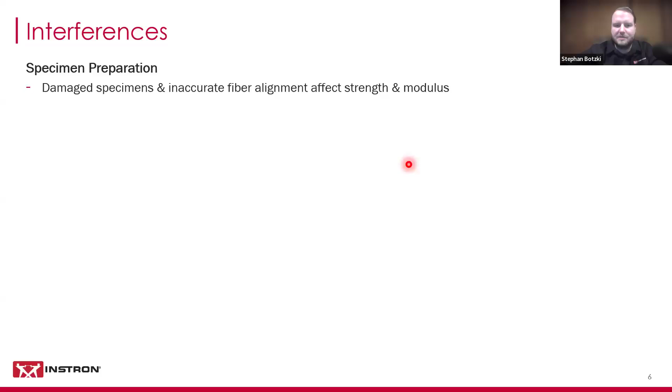The same is true for inaccurate fiber alignment, which is much harder to figure out, but there are things in the testing standards and practices you can use to find out if your alignment is in good condition, within the tolerances the standards allow.

You also need the right ratio of gauge length to thickness to prevent buckling in compression tests, for example. Testing standards give good guidance on what ratios to use, or they have standardized specimens known to work well.

So if you need to make adjustments to yours, make sure the ratio works. Otherwise buckling will affect your strength and especially your strain and therefore modulus readings.

On the other end, if you're doing tension tests, you should consider maximizing the length of your specimens beyond the minimum length requirements in the standards. There's typically, from what I've seen, no maximum length, just a minimum length.

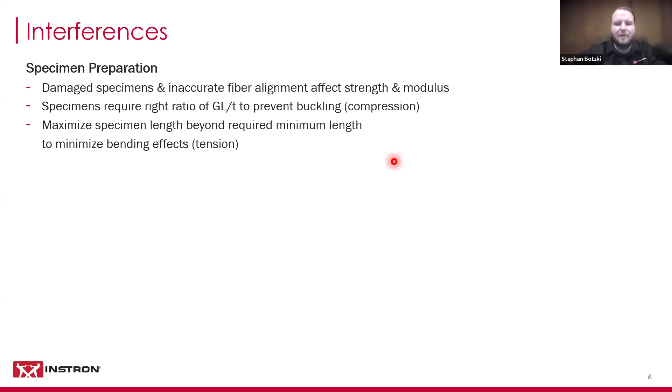If you think about it, if you maximize that, any bending errors introduced from the grips would be minimized—the longer your specimen is, the less effect a certain amount of error will have. So just increasing the length can help you with that.

If you're doing end loading tests where your specimen gets end loaded, like ASTM D695, or a combined loading test like ASTM D6641, you need to make sure the ends of your specimens are flat and parallel, because that's one of the major ways you introduce the load in combined loading, for example. If your ends are not flat, you'll have uneven load introduction into your specimen.

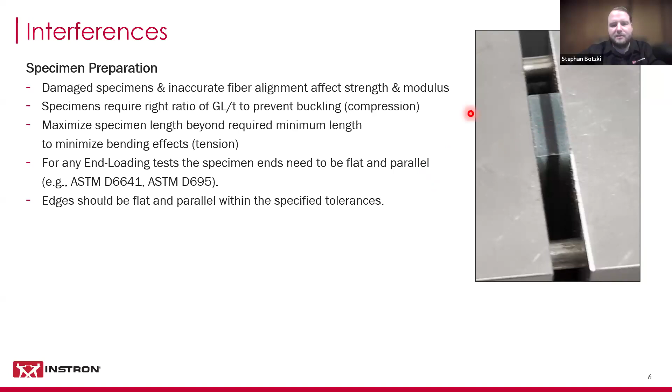You might also have failures where you didn't want them—you don't want them to fail at the ends. The edges of your specimens also need to be parallel and flat within the specified tolerances of the testing standards.

And lastly on this slide, make sure you label your specimens so that if you need to check back for any errors, you can trace back to the raw material your specimens came from.

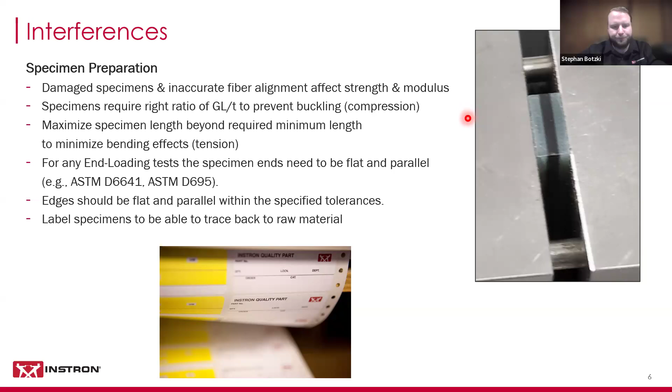If you make specimens, you should consider molding them individually, or if you have to, cut them from a plate. If you cut them from a plate, make sure you avoid any notches, undercuts, or rough and uneven surfaces.

Or you could also have delaminations, caused by inappropriate machining methods—this is when you're actually milling the composites. So be really careful with that.

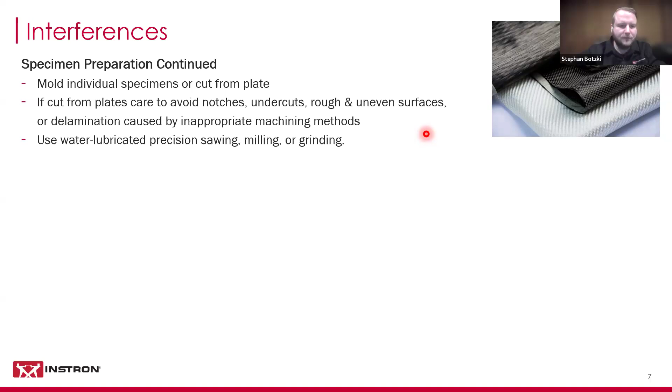Typical processes that have been used successfully in the past are, for example, water lubricated precision sawing, milling, or grinding, and diamond tooling, which is very effective for many material systems.

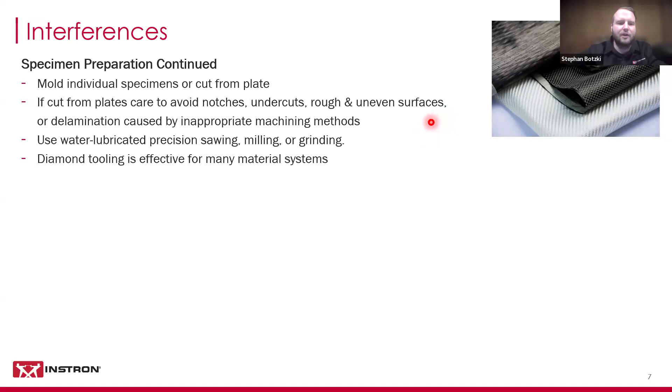There are also testing standards that focus on this, for example ASTM D5687 for preparation of flat composite panels, which has processing guidelines for specimen preparation specifically. You'll see some of these standards referenced within the testing standards themselves.

In ISO, for example, there's 1268, the method for producing test plates and molding of prepregs. And in the testing standards themselves, for example ISO 527-5 for unidirectional fiber reinforced plastics, there's a lot of information on how to properly prepare your test specimens and tolerances and so on.

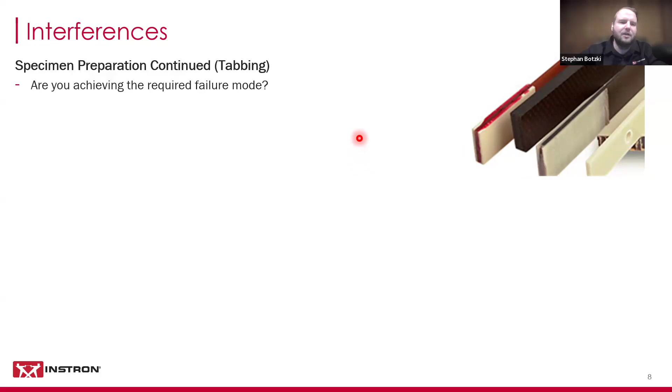One question when we talk about tabbing is, are you actually achieving the required failure mode within the testing standard? If you're having a successful test where the specimen fails in the gauge section with the right type of failure mode, you probably wouldn't even want to consider tabbing because you're achieving the right results. But if you have grip failures or failures outside the gauge section, that's the time to really think about your process and consider using tabs.

What you could start with is something like friction tabs, like emery cloth or sandpaper. Using the rough side is usually what has been successful for me personally. You put that around your test specimen ends, then clamp onto that with your grips. That has definitely helped me achieve the right failure modes and get them in the gauge section of the specimen.

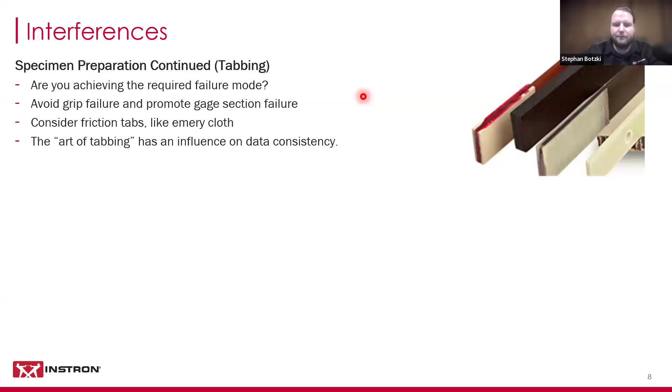Sometimes friction tabs alone are not sufficient, and then you need bonded tabs that are glued to your test specimen with an adhesive. Tabbing itself is kind of an art, and it can definitely influence your testing data and the consistency of your data. So just like the specimen preparation itself, where you machine the coupon, you need to take the same care with your tabs and follow the tolerances within the testing standards.

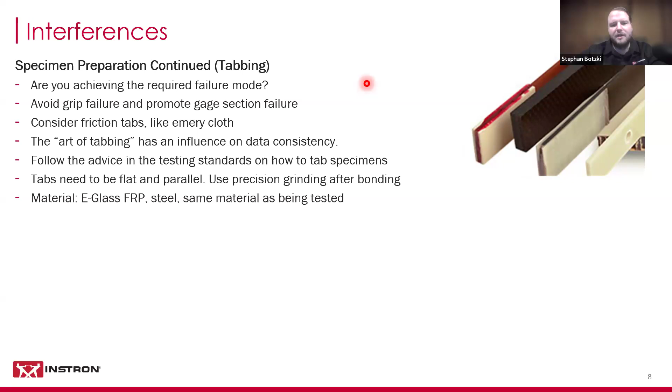That's what you should look at when figuring out how to tab and what tolerances to follow. You also need to make sure they're flat and parallel, using precision grinding methods after they've been bonded. Typical materials used are glass fiber reinforced plastics bonded to typical CFRP coupons. I've also seen different metals like steel or aluminum used, and some testing standards actually recommend using the same material being tested as the tab material as well.

A little bit on strain gauges here. Strain gauges can also give you strain anomalies due to either direct gauge disbonding, a potential separation of the leads to the strain gauge, or the surface ply of your specimen separating. All of those things will affect your strain measurements, and strain gauges are still a lot of the tests required to obtain your strain data.

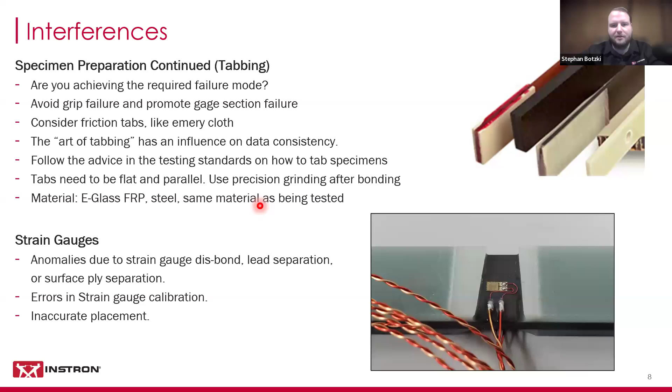You could also have errors in your strain gauge calibration. You've got to make sure, for example if you set it up in Bluehill, that you use the right gauge factor for your strain gauges. And of course, inaccurate placement of the strain gauge itself will also cause a lot of inconsistencies in your testing data because you're just not reading your strain data in the right orientation.

Now let's assume you got your perfectly prepared test specimen. You need to measure it as well, and there could be inconsistencies if you're not using the right procedures, not always doing it the same way, or if the equipment you're using isn't accurate enough. Testing standards typically have sections or reference other standards focused on measurements, giving you the required tolerances for the equipment you use, like micrometers—what kind of end they need to have where they touch the specimen, and the accuracy they need to have.

In general, composite testing standards like ASTM D3039 or 6641 are very popular, and they typically require you to measure the width and thickness at three different locations within the gauge section—which is also where we want our failure to occur. So that's the area where you do the three different measurements for width and thickness, and then you average those, and that's what you use for your values.

There's also software assistance you can use. You can see here on the screen how you can connect a micrometer directly to Bluehill Universal, then measure your specimen, and either with a click or with a foot pedal, if you prefer that, you can have that data directly entered into the testing software. That way you can avoid any kind of error between reading the result and actually entering it.

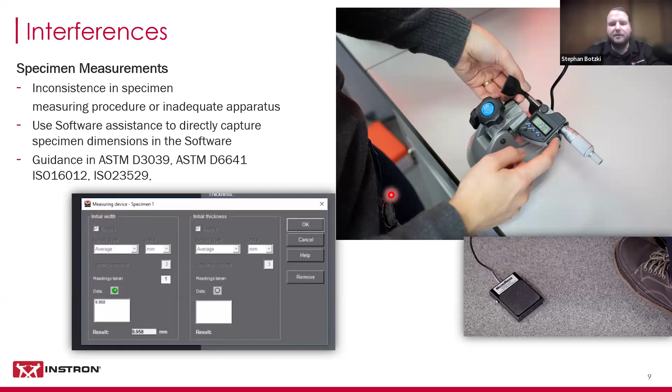There's also a feature in our software called Workflow. You can find it in the Method tab, and then in the different tabs below, all the way to the right, there's a section called Prompted Test, which you can activate with this toggle called Run as Prompted Test. You toggle that on, and then below you can make different sections of the test.

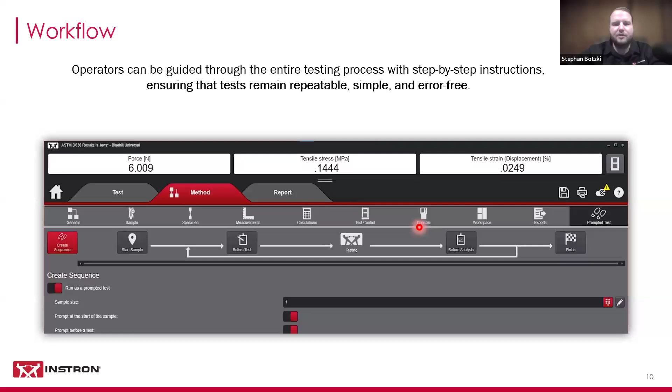You can see that in the workflow itself, at those steps - for example, you start a new sample, or batch, right before the test of a specimen, before the analysis, after the test. At all those different sections, you can prompt your operators and put little notes or little pictures like you can see here.

You could put any kind of important note or specific equipment that has to be used. You can use pictures to prompt your operators and guide them through, so they need to click on the arrows on the bottom to advance further and make the required entries.

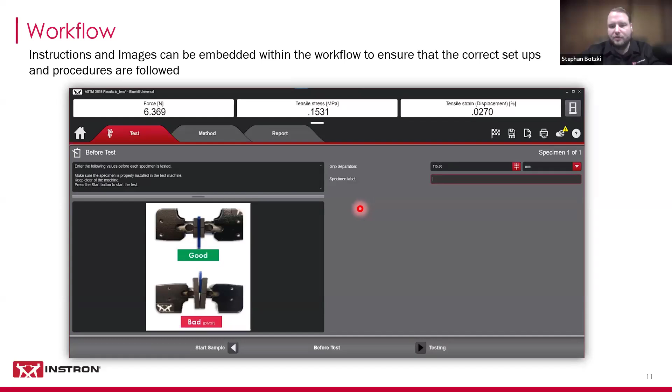You can remind them, for example, if you're using an extensometer, to make sure it's the right type that they're using, and that the placement onto the specimen is correct, and that the extensometer is not crooked, because otherwise that will give you variation in your strain measurements, and therefore inaccuracies.

Now we're going to move on to the next section of our presentation, which is on test equipment considerations, from Ashley.

We definitely want to ensure we are using a stiff machine to handle those high strength materials. Here we have data collected when we performed high strength breaks on our latest 6800 series of frames, showing that the bulk of the energy, as shown in Gs, is absorbed in the base of the frame at 145 Gs, followed by the crosshead at 105 Gs, with our critical electrical components and where our motor lives experiencing the lowest amount of Gs during the high energy break at only 27.

This is all influenced by the preloaded bearings, precision ball screws, the solid thick crosshead, the solid base beam, and low stretch drive belts. Ultimately, this leads to superior performance and longevity of our frame.

These design considerations are also super important, as we want to keep the testing machine compliance to a minimum, as it affects the strain rate when we're using crosshead control.

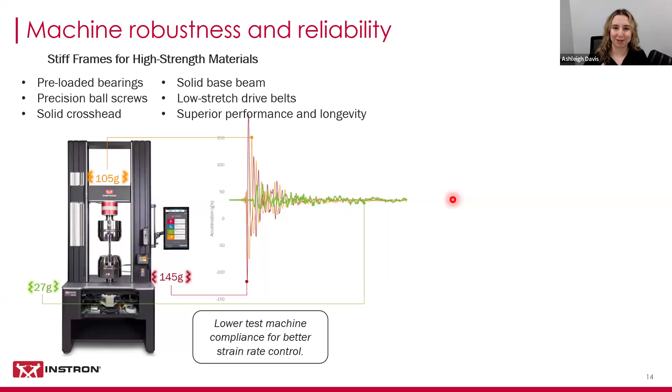Machine compliance can also be influenced by having a simple load string with as few connection pieces as possible. We want to make sure we're not over piggybacking within the load string, because we're then just building compliance essentially. And it's also these design considerations that influence our load string alignment.

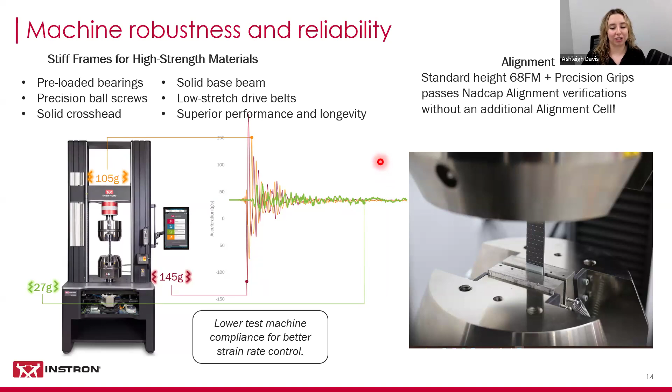The 6800 series of frames with either precision manual wedge grips or hydraulic wedge grips can actually pass NADCAP alignment verifications without the need for an additional alignment cell, when being used with our standard height of frame or our E1 option of frame. I'm going to get much deeper into alignment later - we're going to spend some time on that.

To keep our frames functioning for the long run, we made design changes to our floor model systems to improve the ingress protection of those electrical components and where the motor lives, to better deal with all of that carbon fiber debris. We wanted to make sure we're preventing all of that from getting inside and gunking up our components.

The 6800 series frames were designed with improved ingress seals to combat the dust and debris by adding a gasket between the rear cover and the base beam to reduce the gapping that might have been there. And we improved the existing gasket on the front cover.

On the right, you can see our previous generation of frames where we had some cabling and a limit rod. There were actually access points to go into the base of the frame, and those holes can allow for dust and debris. So our engineering team removed those completely, so we are completely sealed.

It's simple changes like these that can help strengthen the protection of those components within the frame, which means less time for having to clean and hopefully less servicing.

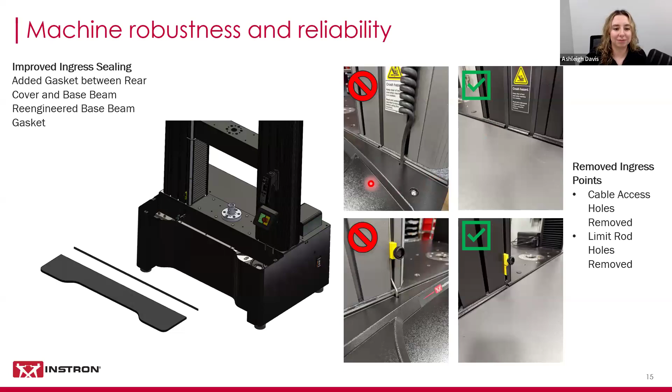I'm going to spend some time talking about load cells. Instron is really unique in that we're the only global material testing supplier that designs and manufactures its own load cells. And an important point here is the measuring range.

You can test down to 1/1000th of the load cell capacity and still meet the accuracy requirements of international standards at 0.5% accuracy. This allows you to conduct testing which requires high forces, maybe tensile or compression tests on coupons, and then also testing for lower force tests, such as interlaminar shear strength testing, without actually having to switch out your load cells.

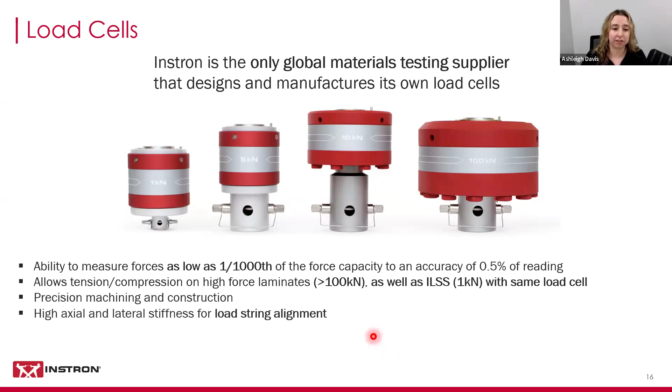Now, as I said before, we don't want to add more compliance than we need to the frame. So if we don't have to piggyback, we definitely don't want to. All of our load cells are high quality, manufactured using precision machining and construction. And then, as I said before about the frame, high stiffness is important. So our load cells also have high axial and lateral stiffness for load string alignment, as well as reducing that compliance.

So next I want to talk about how do we actually read the specifications of our Instron load cells. On our product sheets, we state that the load measurement specification as a percent of reading down to a fraction of a load cell's capacity.

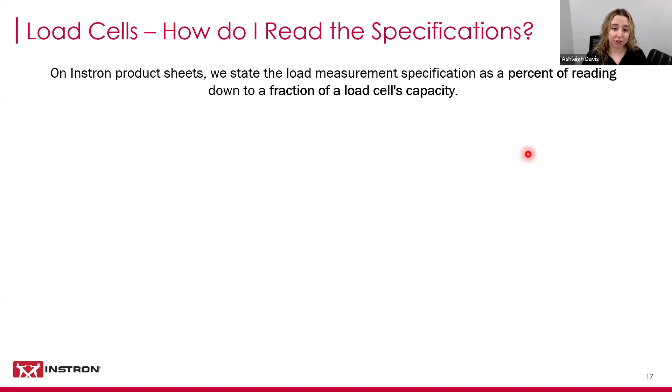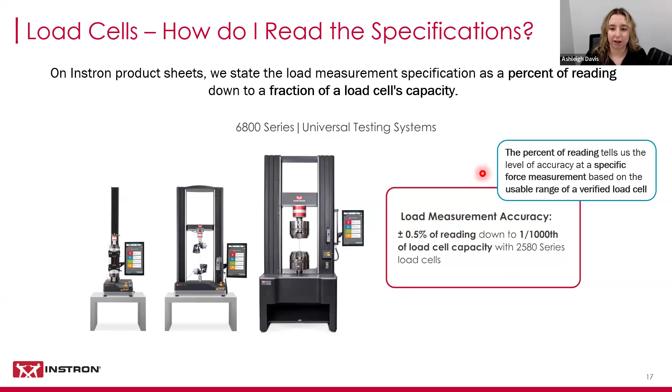So for example, this will read as, for our 6800 series, we state that load cells on these frames have an accuracy of plus or minus 0.5% reading down to 1/1000th of the capacity of the load cell of our 2580 load cells. So essentially, our percent of reading tells us the level of accuracy at a specific force measurement based on the usable range of a verified load cell. And we'll get into some examples on real life load cells.

So if we have a 10 kilonewton load cell, what is our accuracy actually at 1 kilonewton? With an accuracy rating of plus or minus 0.5%, this would mean our actual value at 1 kilonewton is guaranteed to be anywhere between 995 newtons and 1005 newtons.

So that's our accuracy. What is our range? How do we determine that? Our usable range are the upper and lower limits of the forces that a load cell can be used to measure while meeting that guaranteed accuracy rating. So this is represented as that fraction. So we read plus or minus 0.5% down to 1/1000th.

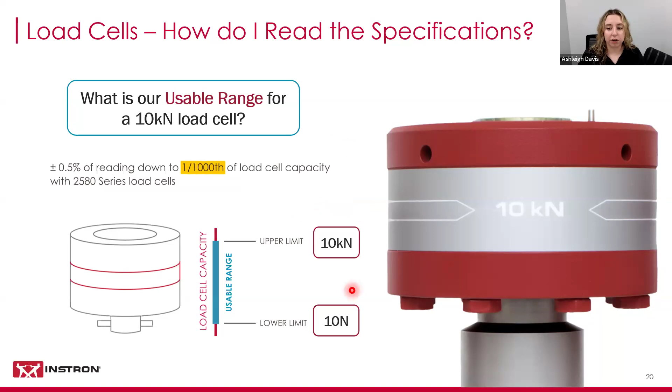The 1/1000th is the key phrase here. So 1/1000th of 10 kilonewtons is 10 newtons. Our usable range, where we guarantee that plus or minus 0.5% accuracy, is 10 newtons to 10 kilonewtons. Anything outside of that would not meet the guaranteed accuracy rating and should not be used.

Let's look at how this compares to other suppliers. On the left, we show the graph for Instron as the percent of reading. And then on the right, we show the graph for load cell accuracy as a percent of full scale.

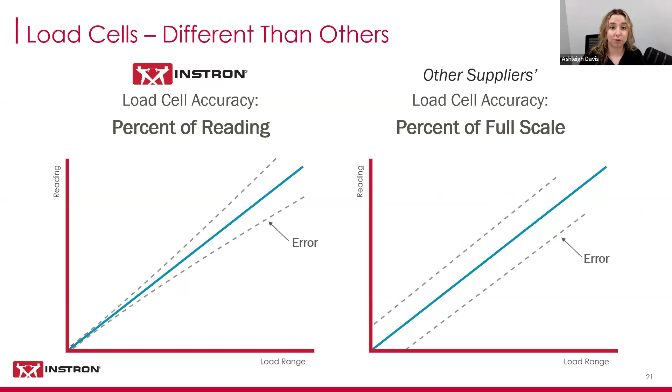The distinction here is that when we're doing percent of reading on the left, the error actually scales with the force reading. So as we have a higher value, our error is going to be a little bit higher. With accuracy as a percent of full scale, that error is constant and becomes much more pronounced at those smaller load readings. So it might be 100 newtons, but it's going to be 100 newtons upper and lower.

We'll do another example. So we have an Instron frame, 50 kilonewtons, with an accuracy of plus or minus 0.5% of reading throughout the entire range. And then our other supplier with a 50 kilonewton load cell, an accuracy of plus or minus 0.1% of full scale. So if we actually pull up those graphs again, we'll start by looking at 50 kilonewtons on the Instron frame.

0.5% error at 50 kilonewtons is 250 newtons, which is a little bigger than what it would be on the other supplier. But if we're using this system to do low force testing and we are reading a value of 50 newtons, on the Instron frame, we have that 0.5% error at 50 newtons as plus or minus 0.25 newtons. If we go over to the other supplier, at a 50 Newton reading, we have 100% error, at plus or minus 50 Newtons.

So although we might be better at higher values, you could say, this is huge if you are trying to do a lower force test on the same load cell. And it's very likely you won't actually be within the range of the standard at these lower values.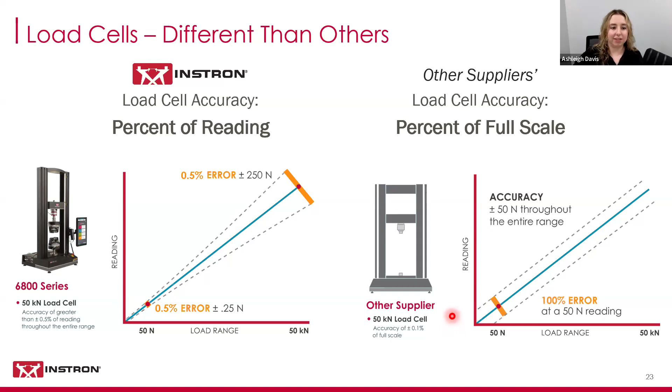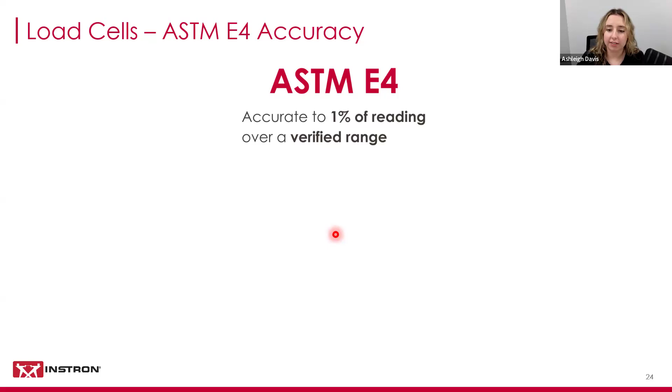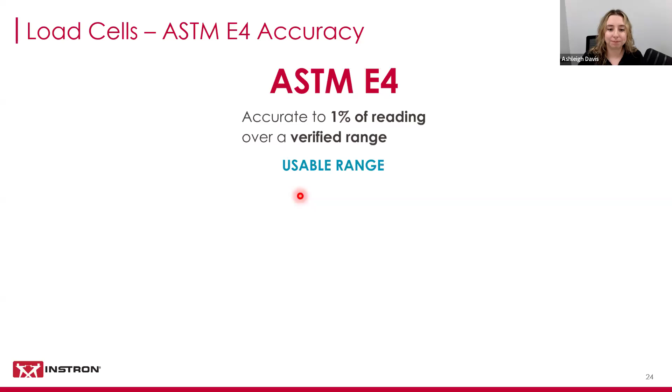So many testing standards do refer to ASTM E4 or ISO 7500-1 to define the accuracy requirement. For instance, ASTM E4 specifies the machine needs to be accurate to 1% of reading over a verified range, and this is what we call our usable range. We use that percent of reading to meet the standard of E4.

If we pull up those frames again and compare the usable ranges within E4 of Instron versus the other supplier, Instron's usable range goes all the way down to 50 newtons, while the other supplier's usable range only goes down to 5 kilonewtons. This means if you want to do anything below 5 kilonewtons, you're going to need to purchase additional load cells, which increases your expenses and increases complexity.

Each load cell is going to need to be calibrated, maintained, and stored safely, as well as piggybacked onto that system. We always recommend checking with your standards to ensure compliance, and I recommend checking out the reference video that our colleague Sammy Sadler made regarding this topic, which goes into it even more in depth.

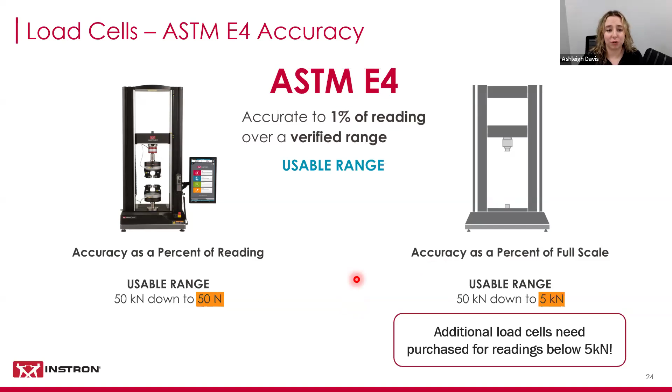So machine robustness and reliability regarding calibration is another consideration that we take. Another unique strength that sets Instron apart is that we have our own deadweight stack here in Norwood, Massachusetts, which is actually used for all of our calibration cells that our service engineers use on site when they're calibrating your own load cells.

In addition to that, you're also going to need to consider your strain devices and regular calibrations of them. Our calibration procedures are fully compliant with ISO IEC 17025 and provide assurance that your test data is valid and your processes are properly controlled.

Talking about another thing within Bluehill Universal, your operators may have to frequently change the test setup with different fixturing. Maybe you're doing tensile tests, piggybacking compression tests. All of these might have different crosshead positions within the frame.

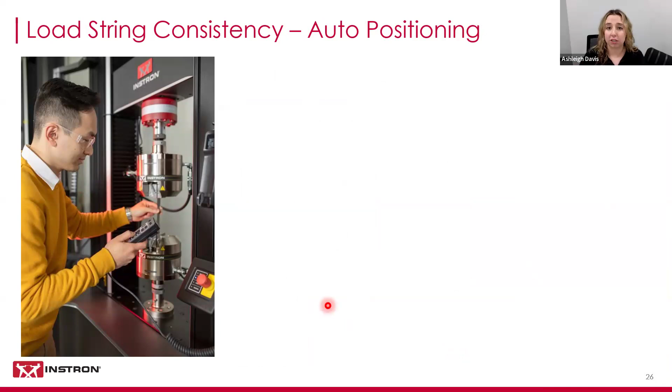A helpful feature within Bluehill to deal with these different setups and at the same time reduce variability of your starting crosshead position is auto positioning. Auto positioning makes use of an absolute encoder to configure fixtures for consistent setup. You can save the fixtures within Bluehill to their correct separation in the test method, and then you let the software do the work to figure out where the crosshead should be, rather than eyeballing the crosshead when you're doing that initial setup the first time.

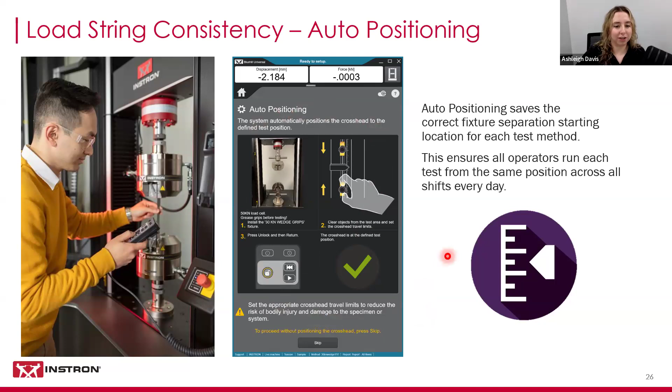Visual reminders show operators what their fixtures should look like and warn them where the crosshead's going to go before it adjusts. You can see an example on the screen of what the operator would see when they're setting that up, but we do also have a little video that we can go to, which shows it a little bit better.

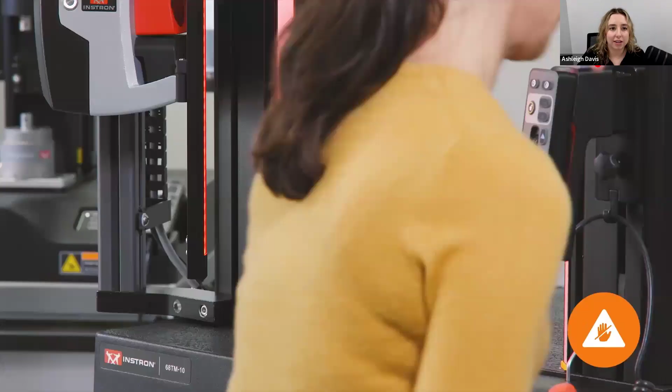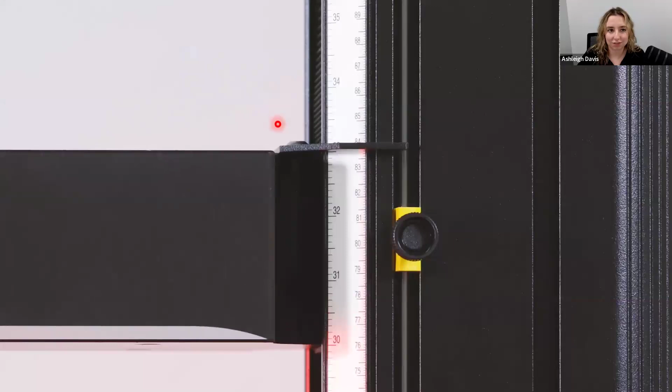So the operator has these 10 kilonewton pneumatic grips. When she opens the method, it indicates where the crosshead position will be, as well as shows the images of what the load string should look like. Press go, and then it's always going to be in that same initial position. As I said, you don't need to eyeball it. It's just going to save that for you.

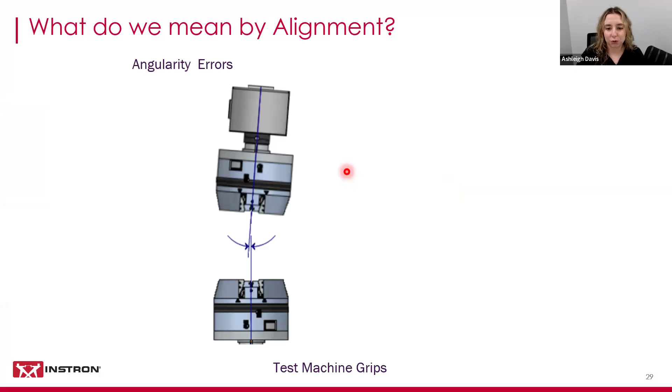Next, I'm going to talk about alignment and why alignment is so important. So there are two main types of misalignment that we can experience within our load string.

The first is that of angularity errors. This is where our upper grip versus our lower grip might be at a different angle, causing a bending moment. This is going to cause a positive tensile strain on one side of our specimen, indicated in blue, and then a compressive negative strain on the other side of our specimen, shown in orange.

The other type of error that we can have is concentricity, where our upper grip and lower grip are not concentric with one another. This actually creates more of an S-type bending moment within our specimen, so we have regions of positive and negative strain, and this is before we've even started the test. So we've loaded our specimen and we've already created these pre-stresses, these pre-strains to the specimen, essentially damaging the specimen before we've even gotten good data.

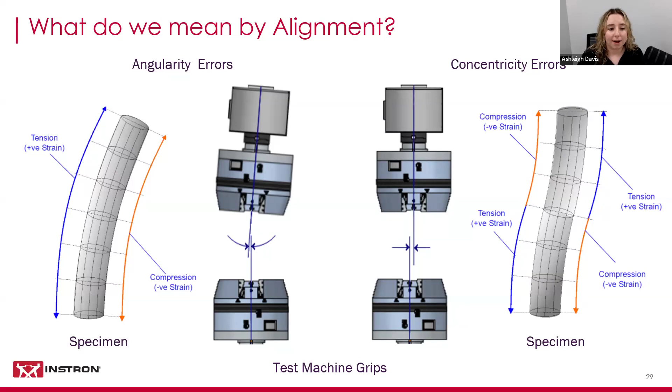And I want to talk about next why that's so important. Why is it so important that we're not pre-damaging that specimen? I'm going to talk a little bit about metals.

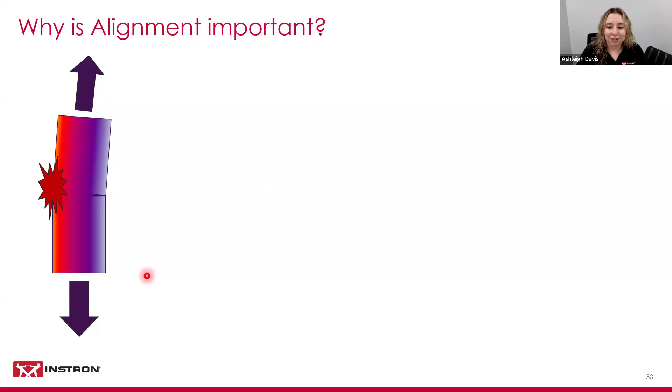So if we show a typical stress strain curve for a metal specimen, and if that metal is misaligned, so you have tension and compression occurring on the specimen, that metal is going to yield on that one side of the specimen before it does on the other side, but it is going to continue elongating, essentially carrying that load, and show that typical stress strain curve going from the elastic region to plastic.

And as I said, even if you yield and carry that load, the ultimate tensile strength is ultimately going to be the same. Your modulus and yield will likely be different, but the important thing is that the specimen can kind of make up for the misalignment and continue to carry that load fully.

If we compare that to a composite specimen, if we're misaligned, composites are particularly sensitive because they generally are brittle and have low strain. For example, you might have a thermoset resin-based composite in aerospace. Your fibers are going to be very brittle. And if you've loaded it and it already has a pre-stress, those fibers have begun to break before the test even starts.

We've essentially lost the strength of the specimen. When you have those first fiber breaks, you're going to have a successive rapid failure of the whole specimen. It can't handle carrying that load and redistributing it like the metal specimen can. This is ultimately going to influence our ultimate tensile strength as well as our modulus and stress-strain results. There is no plastic region and we can't redistribute. So this is not ideal, preemptively loading something that's misaligned.

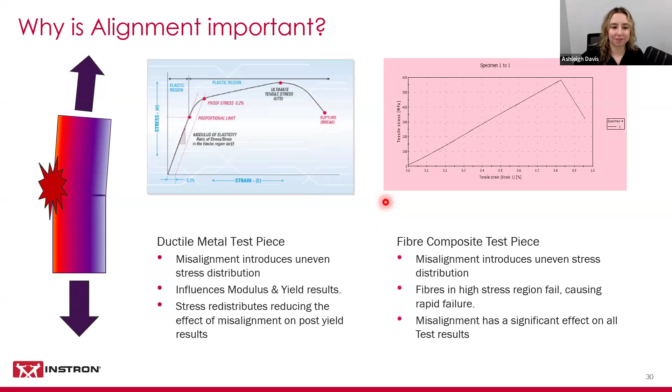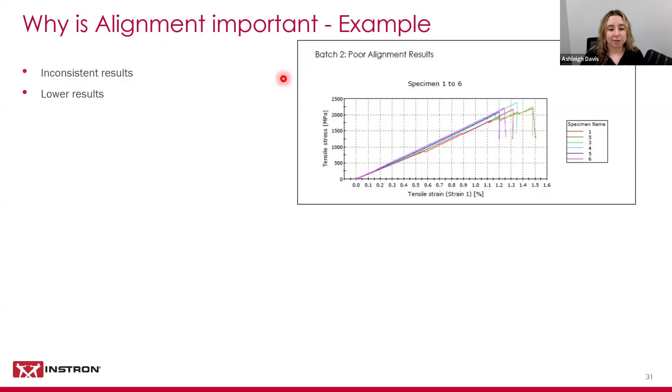We did some tests a couple years ago where we purposefully tested coupons in a misaligned load string. Here we had an instance where we had grips in the frame, but the grips were not aligned using any kind of secondary alignment feature. And there was a bending moment occurring within the preloaded specimens at about 26% bending moment.

In the bottom, what happened was that the load string was then aligned properly using an Align Pro fixture, as well as software, which I'll show in a couple slides. Essentially, that got the initial bending moment of the specimen to 5%. So we went from a 26% initial bending moment to 5% initial bending moment.

We can clearly see in the upper graph that there's a lot of inconsistency. We have essentially some rough stress-strain curves and a wide distribution. In our lower graph, we can see that we have less distribution throughout the curves. They're much cleaner. And we actually had a 6% increase in ultimate tensile strength when we did the alignment properly.

This might sound like a small number, but that could be the difference in quality control environments that allow shipments or even getting business versus a competitor. In areas like aerospace, including which involves NADCAP, they mandate proper alignment.

So for metals, they essentially say 10% alignment for ductile, 8% for non-ductile, and 5% for cyclic. For NADCAP for composites, they indicate that the bending moment cannot be more than 8% upon initial loading. And as I said before, the lower graph was an average of 5%.

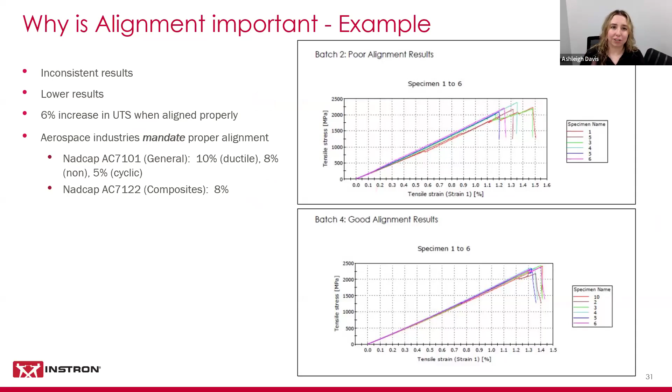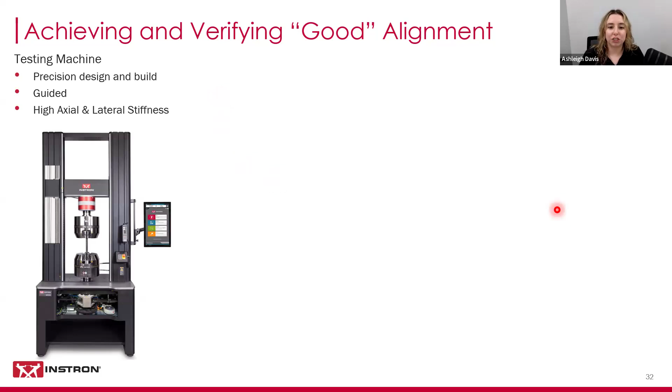So then how do we achieve and verify good alignment? First thing, I already talked about this. We ideally want that stiff testing machine with the high precision design and build. It helps with longevity as well as alignment.

We want to use precision grips that are wedge acting and symmetric, which can allow for testing in ambient and temperature environments, as well as allow us to piggyback other fixtures, like if we were to do compression testing. We can introduce the alignment fixture.

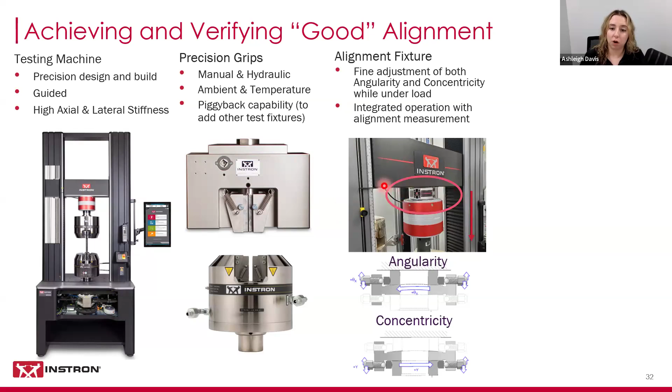This is our Align Pro, which allows adjustments of the angularity and concentricity while under load. It sits in between the crosshead and the load cell. You essentially get it adjusted by service, and then you forget it. And that should be good for the year.

This does pair with our service products, which includes the accredited alignment verification using standard or custom strain gauge specimens. So we can report out the bending moment in the load strings using that Align Pro software.

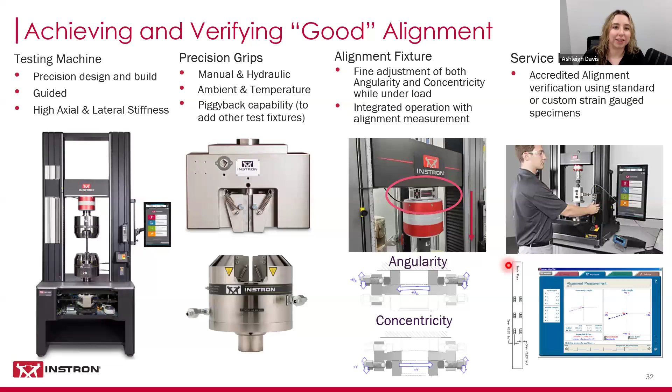I want to talk a little more about gripping. It's no good having a stiff, well-aligned load string if our grips are not repeatable. We need very repeatable grips. The characteristics of the grips required typically...

The moving body means that the faces move horizontally. The faces don't move vertically at all relative to the specimen. So we're always providing consistent side loading clamping on a specimen. And we don't cause any kind of initial compressive or tensile load in the coupon, which again could cause any kind of pre-breaks.

The other thing is the symmetrical wedge pocket, and what I mean by that is symmetrical front to back, that controls the alignment of the jaw face, and the jaw faces are always looking to meet on the center line of the testing machine. And then front to back symmetrical body. Also, if we have a grip where it has a back feature, that means it is technically heavier in the back and can cause a bending moment when you load that specimen.

So we want to make sure that we have that front to back symmetry. And then just like general grip tips that we have, definitely preload your load string. If you're testing with a 1 kilonewton load cell up to a 600 kilonewton load cell and load string setup, you want to make sure that your load string is preloaded. Our machines, typically with the hydraulic and precision wedge grips, already come preloaded and should not be removed.

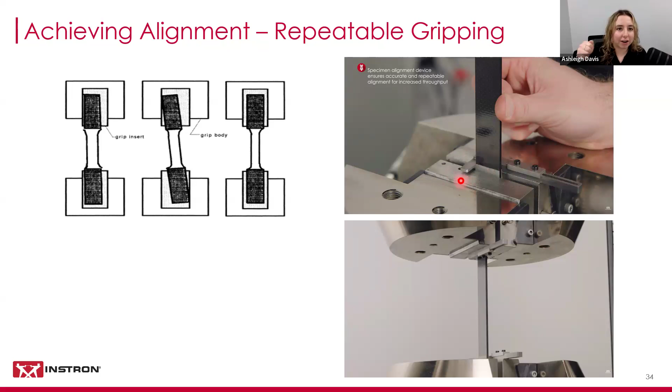Lastly, with gripping, we need to be able to insert the specimens in the grips accurately and repeatably. It's very simple, but you can have specimen stops on your grips, maybe on the grip body or the jaw face, so your operator is always going to install in the same location. And honestly, it just makes it way easier to load into the frame. You're not having to hold your hand up and shaking while you're closing the grips. On the left, you can see how a specimen could be misaligned if we were to more so eyeball it. Another grip tip that we have is check your jaw faces on a regular basis for damages, and make sure that you are center clamping.

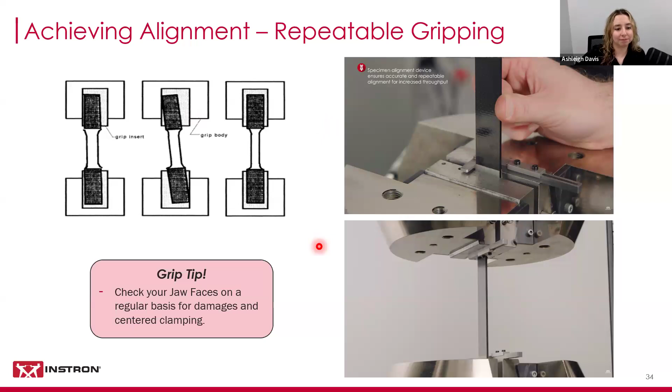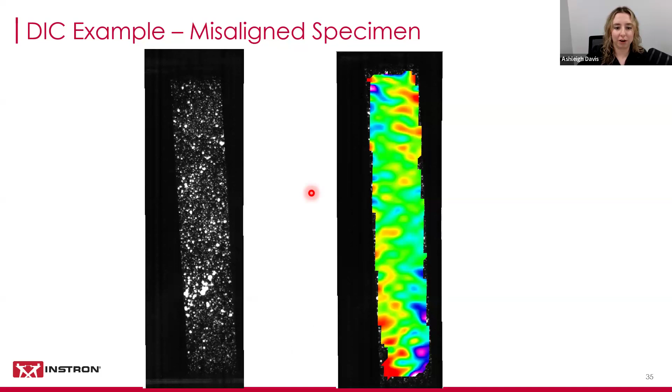So we have an example coupon we tested last year for our strain webinar, where we purposefully misaligned the coupon in the grips, and we used our video extensometer and digital image correlation to map the strain map or the stress map during tests. In the next slide, we have the video of the test actually occurring. And we can see the map changing over the course of the test, with higher concentrations of stress actually in that lower left corner and that upper right corner.

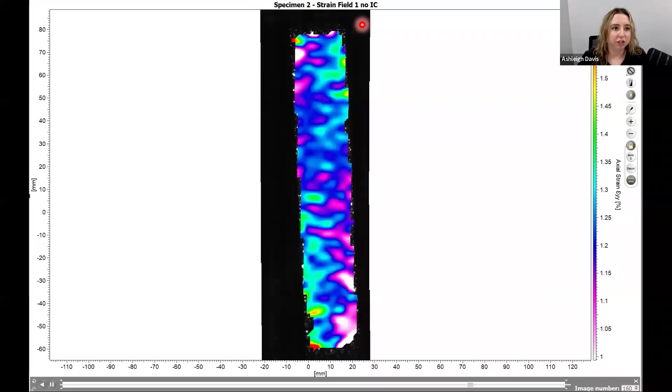So we're not getting even stress strain distribution throughout the specimen. We can see the localized stresses occurring. Ultimately, it's going to fail at that lower jaw face, which is not an appropriate break. And this would be a failed kind of break. With something as simple as the specimen stops, we can hope to avoid this kind of failure.

Lastly, I want to talk about alignment and compression. For compression testing, we typically use compression platens, which have the option of a spherical seat. So one platen would need to be spherically seated, typically the upper one, and one would be fixed. You drive the platens together, and once they're perfectly parallel, you lock that spherical seat, and this essentially meets the NADCAP compression alignment requirements. They have hard chrome surfaces to prevent damage, as well as alignment rings to help you locate your fixtures when you're loading.

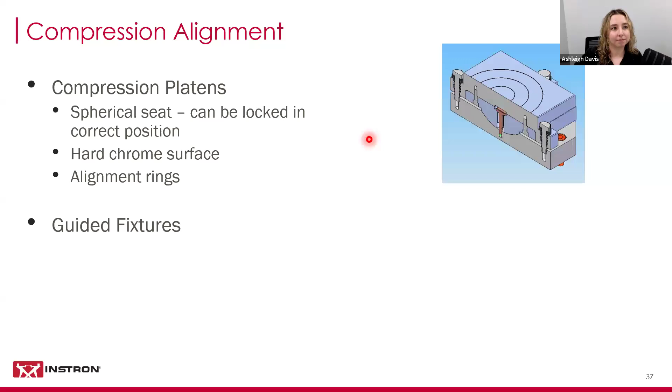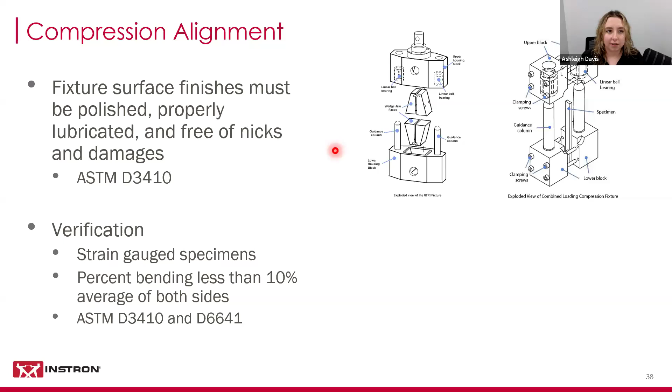As Stephan was talking about before, in terms of our fixtures and our specimens, we do want to make sure that our fixture surface finishes are polished, properly lubricated, and free of any nicks or damages. And then lastly, if we are going to be doing compression testing with bonded strain gauges, there is guidance in ASTM D3410 and D6641 that indicates that your percent bending, so if you have a bonded strain gauge on either side, the average of those of the bending moment needs to be less than 10%. And when you're less than 10% upon initial loading, it's okay to use the bonded strain gauges to report out the strain values that you're seeing within the compression test. And again, this is indicated in D3410 and D6641 if you want to check out more about that.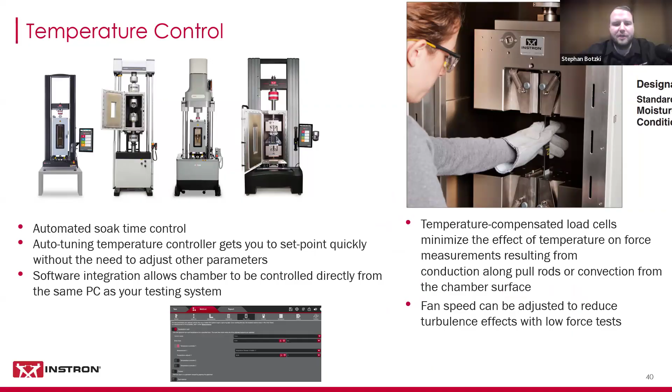So you can use these as a starting point and then just make some little tweaks here and there, or have the service engineer, when he's on site, help you set it up. You should not have to reinvent the whole wheel. We already have very good templates here that you can use and then build your methods from there.

Another very important feature: let's say you are suffering from data inconsistencies and now need to chase down where that is coming from. One point where you can start is the revision history feature.

In the software, you can see here we're in the method tab. You have this little icon up here, with the stop clock and the arrow around it. If you click on that, it will open up what's called the method revision history. What that shows you is, with different timestamps and dates, different days and times when things actually happened, when things were changed.

You can see the action itself. You can see what is affected by it, for example the test rate or the end of test criteria. Then you can see what the new value is that was entered, and you can also see what the previous value was.

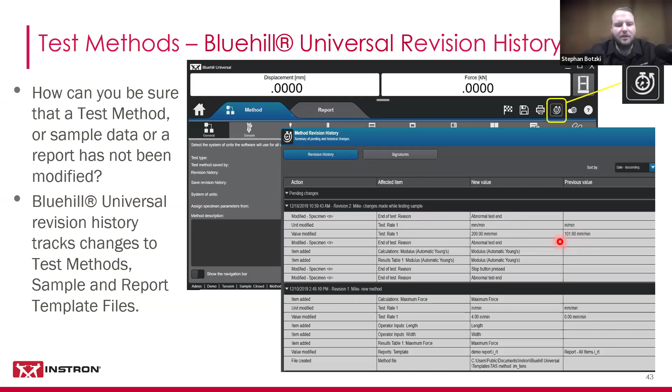So let's say you all of a sudden have inconsistencies from the previous batches you've tested, and you open this up and you might see, okay, the test rate was changed, and then you can change that back and make sure to prevent that going forward.

The same is true when you click on that icon while you are in the test tab of Bluehill Universal. It will open up what's called the sample revision history, which is very similar to the method one, but it's based on the sample, so any kind of entries that have been changed there.

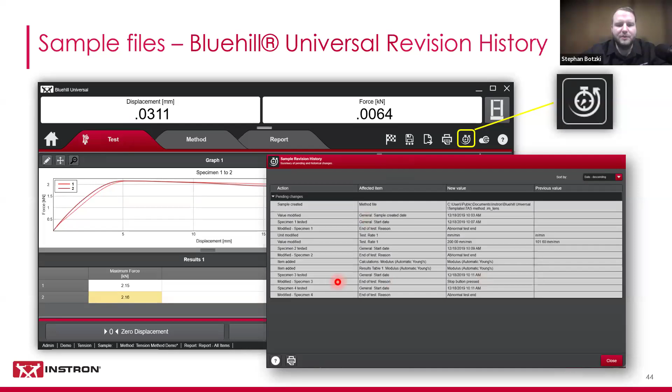So maybe you're reporting and you're missing some entries or something changed, you can pull this up and see what has happened in the past. In general, this will help you track all the different changes in the method files, the sample files, and also the report files.

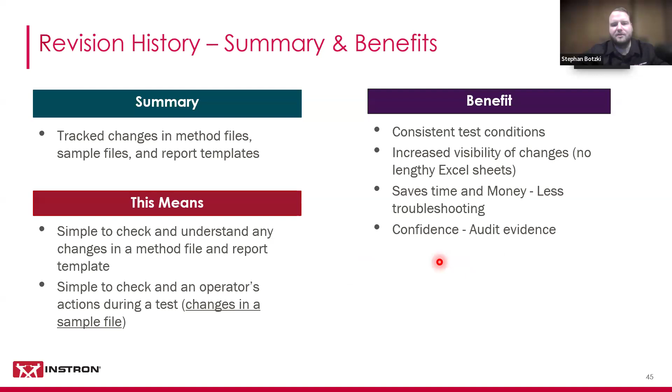It helps you check operator actions during a test and should help you get more consistency, or if you are experiencing inconsistency, it should help you chase down where that is coming from. It should also increase your audit confidence and save you time and money, hopefully, if you have to do troubleshooting.

Another really important feature to prevent these things is Bluehill Universal Security, where you can predefine different user types. You would set up somebody who's the administrator, who can configure the test system and the whole security setup. That person can also do basically everything, from editing methods to testing specimens and so on.

Then you can set up somebody who's maybe the lab manager, who can then edit test methods and test specimens. And then you can set up different operators, who also have to log into the software, which will give you a timestamp of when different operators logged in.

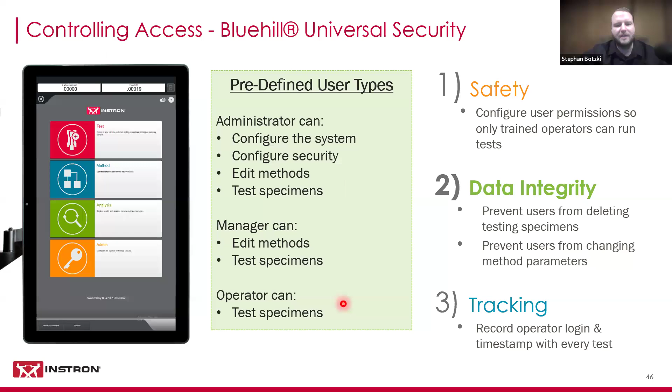They're typically very limited in what they can do, probably just the standard inputs for specimen dimensions and then testing the specimens. Keep in mind, you can combine this with the workflow we showed earlier, preventing operators from doing critical changes that might throw off your data, while at the same time prompting them through the testing with the workflow.

Okay, now we're going to look at some random tips and tricks before we go into Q&A.

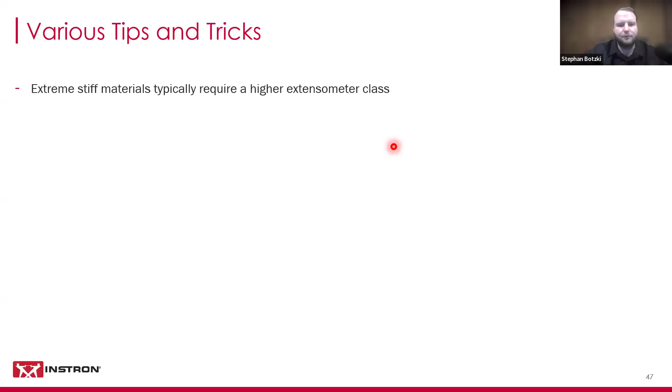If you test extremely stiff materials, you typically need a higher extensometer class. For example, a very stiff unidirectional coupon likely won't strain very much, so using an extensometer of a lower class might make the error too large for what you're trying to read. Think about what you're testing and what you actually need to achieve the right measurements.

Also consider whether you're really getting the right failure modes. If you are, you probably don't want to change much. But if you're not getting the right breaks in the right section, or you have too many retests, that's a problem. Testing standards typically specify 5 or 7 specimens, and if you have to retest 50%, that's a sign to make changes and address your inconsistencies.

It's also important to note that different testing standards will give you different results, for example compressive strength, even with the same material. If you test with ASTM D6641 and get a stress value, then do the same test with ASTM D3410 or ISO 14126, you shouldn't necessarily expect the same compressive strength results. There are different load introductions into the specimens, and therefore different results. So only compare the exact same test types to each other.

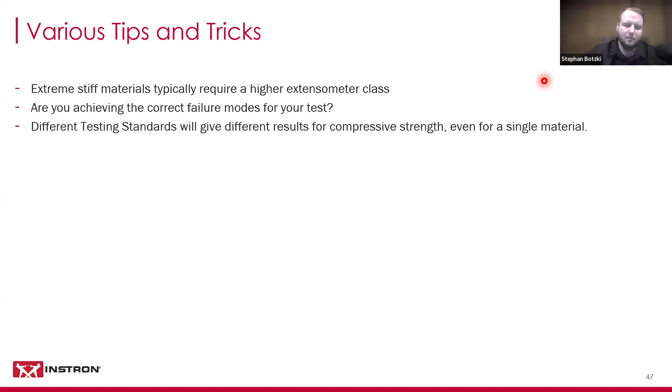Another good one to check out yourself: don't touch the cable of a clip-on extensometer during a test, because it will directly affect your strain measurements. You can test this with a dummy specimen, or just connect the extensometer to your testing machine, have it laying there, watch the strain measurement, then move the cable a little and look at the reading.

It will definitely change. Along those lines, keep vibrations to a minimum when running tests, not just on the test frame itself. For example, we've seen cases with a dynamic machine next to a static machine - lab space is always critical, everybody wants to max out their space. If you run a dynamic test next to a static test, you might introduce vibrations that make your static data more likely to be inconsistent. Keep those things in mind.

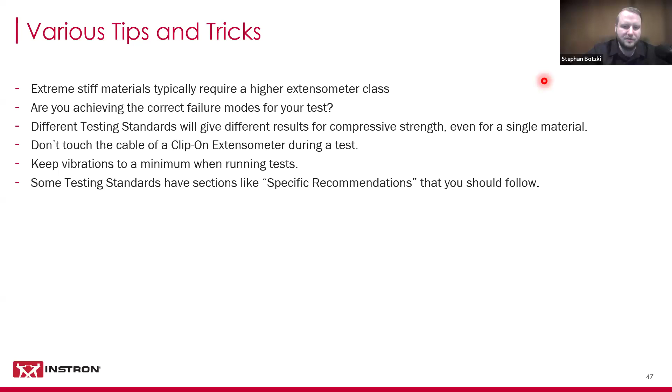Some testing standards also have sections called specific recommendations, and you should very much follow them - there are great tips in there, typically aimed at reducing inconsistencies. It's not required, but very much recommended. In general, read every standard all the way through; there's a lot of very important information in there.

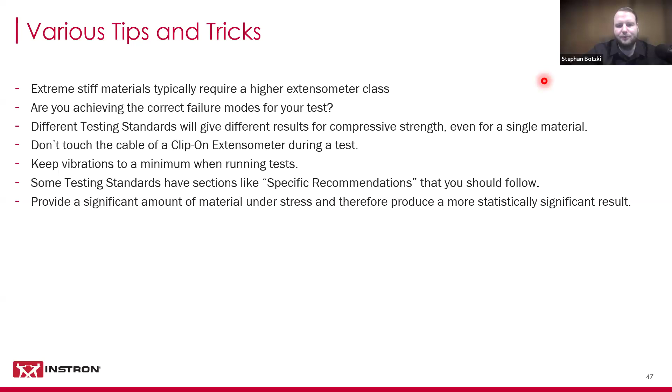You should also make sure you provide a significant amount of material under stress, to produce more statistically significant results. Make sure you're testing enough material to find out what you're actually trying to determine. Okay, so with that, let's see if we have a little time left for questions and answers.

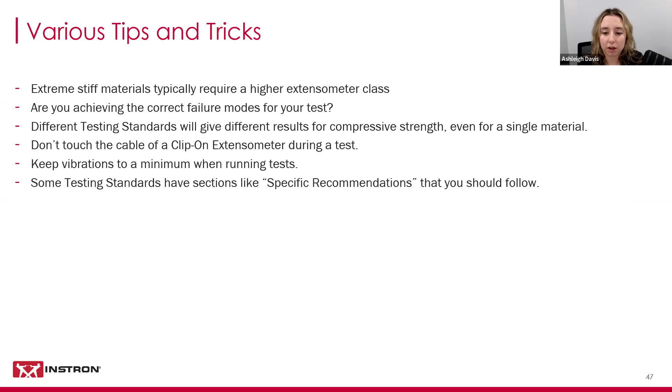Ashleigh, is that also your understanding? If you go to slide 25, there's actually a picture of a clip-on, and we can point out what the wire form is exactly. It's in the calibration section. There we go, here, the metal end here.

Your wire forms, typically in a clip-on situation, are interchangeable and machined with a tension to them. So you'll have some wire forms with a really tight tension, for really thin materials, and then some wire forms that have a notch in them for rounds. Typically, in the handbooks of clip-ons, there will be an indication of the thickness associated with the wire form. But as Stephan was saying, there's typically also that knife edge that holds onto the material.

You just want to be careful. I know this is about composites, but if you're also doing plastics testing, try not to run that knife edge along the plastic dog bone because you could score it. That could possibly happen with whatever type of composite you're testing with. But it's okay to use your fingers to pull those prongs out a little bit and easily install onto the specimen you're testing. I think that's a good point, because then we're back to damaging the specimen potentially.

It's kind of similar to gripping pressure. You want to find the sweet spot of just enough pressure so that you don't have any extensometer slippage, but you also don't want it to cut too much into your specimen, because then you might start notching into the resin or maybe even break some fibers.

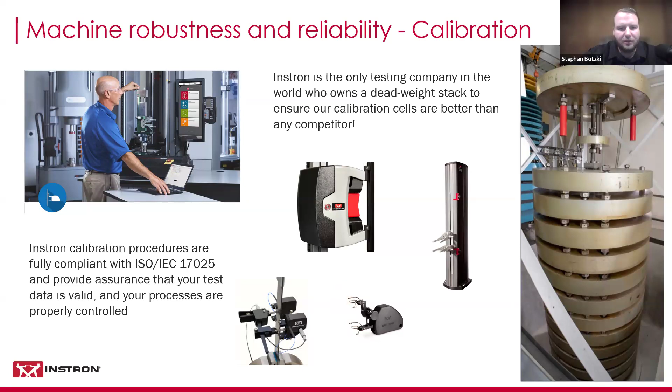I did see that, for example, Wyoming Test Fixture, one popular maker for these test fixtures, has a modified version of this specific fixture, basically duplicated with 4 columns, with the specimen in the middle. Gotta use your imagination here. I don't have the picture ready, but that allows you to look at the flat side of the specimen freely without guiding columns in the way, and somebody tried to do digital image correlation with that.

But keep in mind, if you follow the standard, the opening between the top and bottom surfaces is, I believe, only 13 millimeters, or at least the gauge section of the specimen is only 13 millimeters as far as I remember. That's obviously a very small area, the specimen is not very wide, so the area you're looking at is very small. Therefore, to get accurate results, there's more or less only strain gauges really. But again, if people do R&D, I've seen things like that, yes.